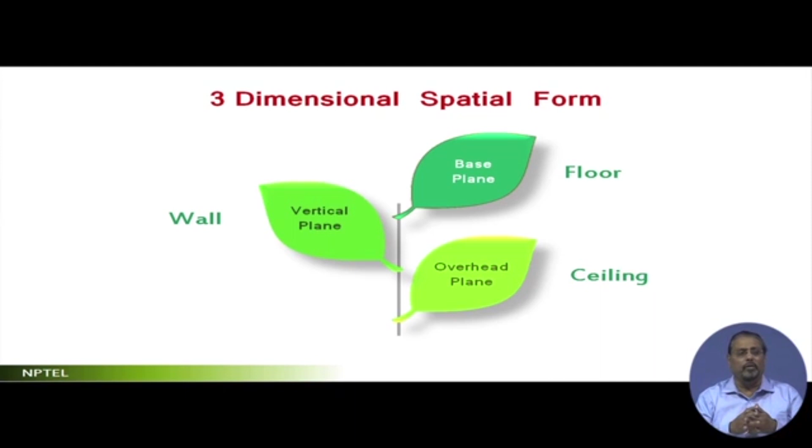The next one is the vertical plane, straight like this. In a building, it is the wall. And the third one is the overhead plane. In a building, it is the ceiling. You can comprehend this very easily if you are an architect or engineer or of any discipline, with respect to an architectural space: floor, wall, and overhead plane. These three planes ultimately make a box, which becomes an architectural space.

Very correct. Now, let us look at this in elemental form. In landscape, what is the base plane? If you go outdoors, it is the grass lawn. What do you have as a vertical plane? A fence. What do you have as an overhead plane? Maybe a pergola. So things are there, only in different form with different materials or different elements.

So here I am trying to focus more on the elements of landscape spaces. Basically, there are two kinds of elements that we will find here. One is the linear element, and another is the spatial element. Linear elements in landscapes are like roads in the base plane. How do you consider what lies in the base plane? Anything below your feet, if you are the user. Anything that goes slightly above and ultimately goes over your head becomes the overhead plane.

What happens to a space which starts with the base plane, remains continuous and ultimately goes to the vertical plane and the overhead plane? It's hybrid, because you won't be able to find out really where it changed. I'll draw one sketch to demonstrate that, in architectural terms. Suppose you have a plane on which you are standing, which has a side like this and ultimately a thing like this, and a person is standing here. I can understand very easily base plane, vertical plane, and overhead plane.

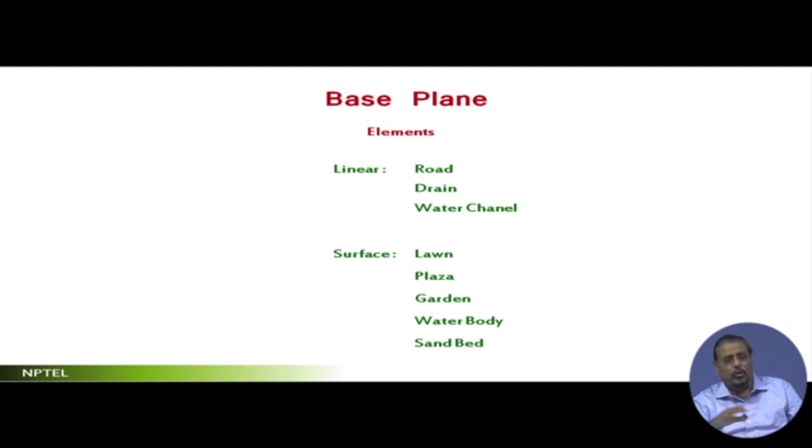Think of anything. I have just given you a few examples; a host of examples you can find yourself. I did not want to clutter this with lots of examples. These are the elements I have picked here, which are very easily perceivable by you. Okay, that is the base plane.

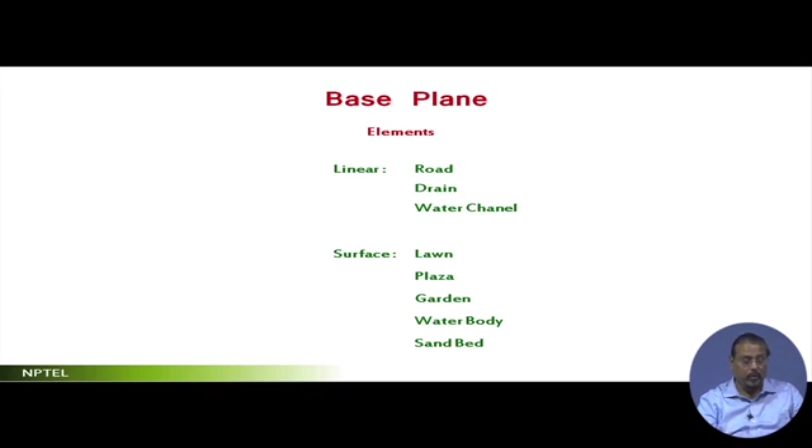do you walk on the water, on the canal? No. But do you sail on the canal? If you do, you are on the boat, the water is at the base. This is how you look at it.

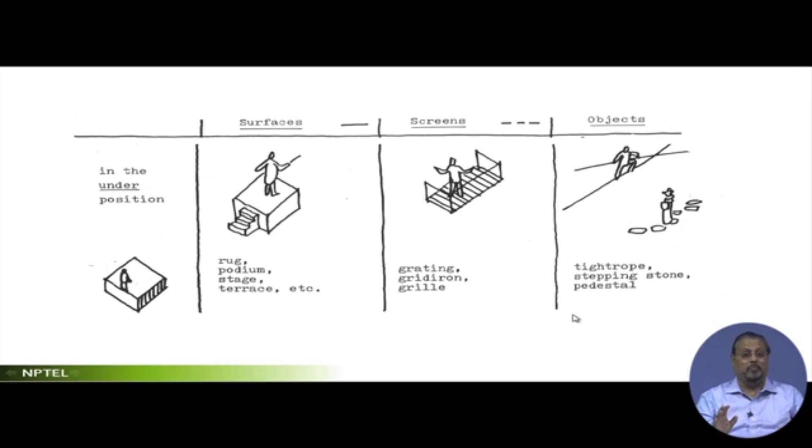Point of reference to a person who is using. For the tightrope walker, this is the base plane, and if you are seeing from below, this is your overhead plane. This is interesting, linear overhead plane. I hope my point is made.

Then comes the vertical plane. Elements, linear and surface, let us see. Vertical plane elements in linear form are tree, lamppost, bollard, signage. What does it mean? Dimensionally, the height is much greater than its other dimensions. The length and width, or the width or depth, this dimension is not 0, but the height is considerably large, where we consider this as a linear vertical element.

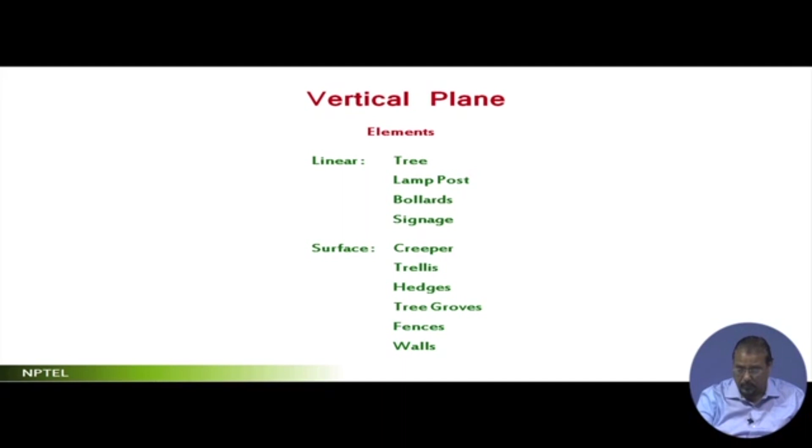Tree. How come a tree becomes a vertical element? Interestingly, a tree becomes different kinds of elements. It can fit in all those kinds of elements. I will tell you how. But before that, let me explain this. A lamppost, okay, a bollard, or whichever. Even, I will tell you, this I have drawn from one side.

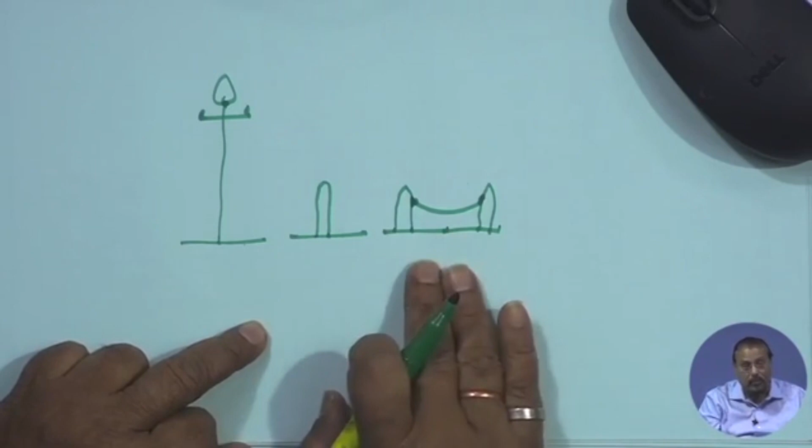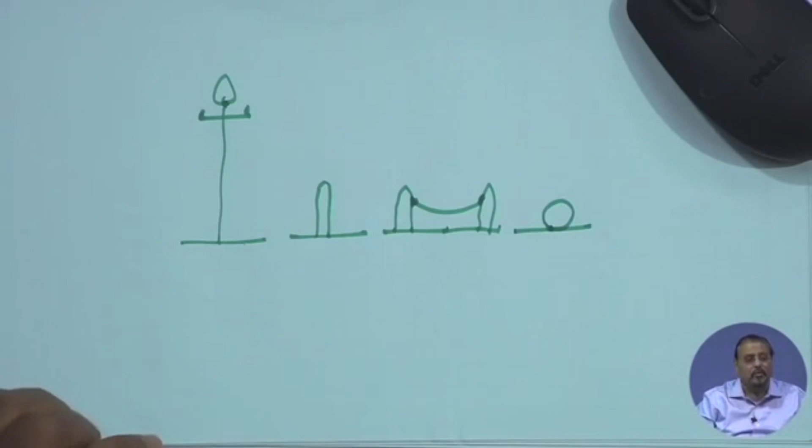If suppose there is a bollard here, the next bollard is here, and there is a chain hanging from here to here. This is also a vertical plane. Mind it. In our landscape, we have plenty of this. You must have seen in many places the bollard is nothing but a sphere, also a vertical plane. The only thing that matters is the scale. Signage, you have a signage here. The post becomes a vertical plane, also this becomes a vertical plane.

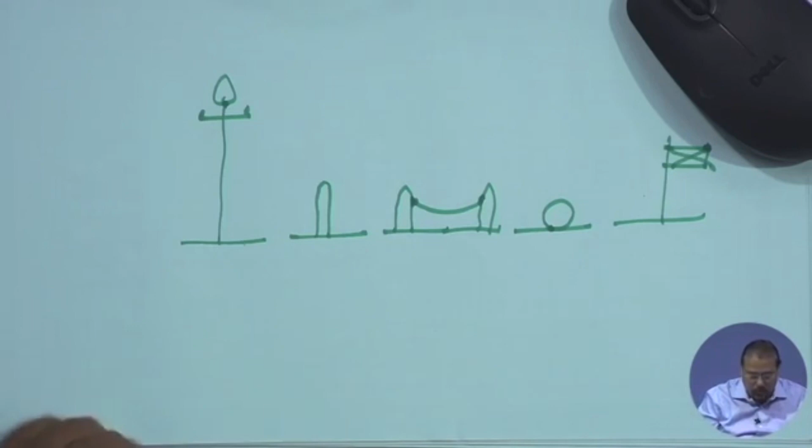So, essentially, theoretically what it is, if you are viewing it from a particular position, and if you are seeing that it is standing upright from the ground to the upper level where your eye hits, it is a vertical plane. If your eye does not hit it at your eye level and it is at a much lower level, still it is a vertical plane. So, let me just try to clarify that idea. A few sections I will draw.

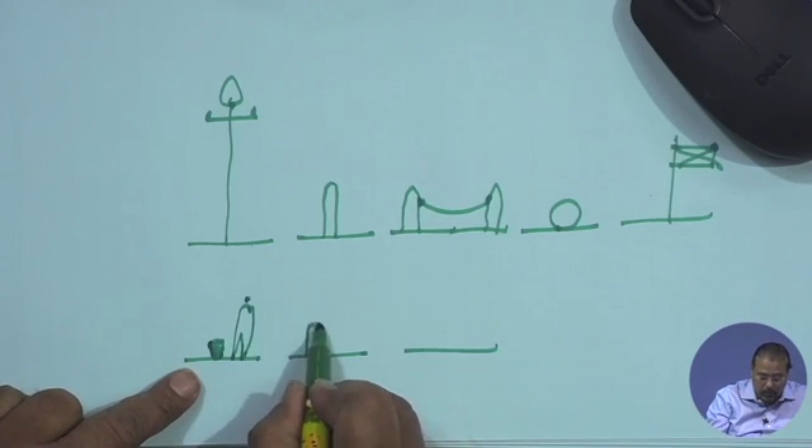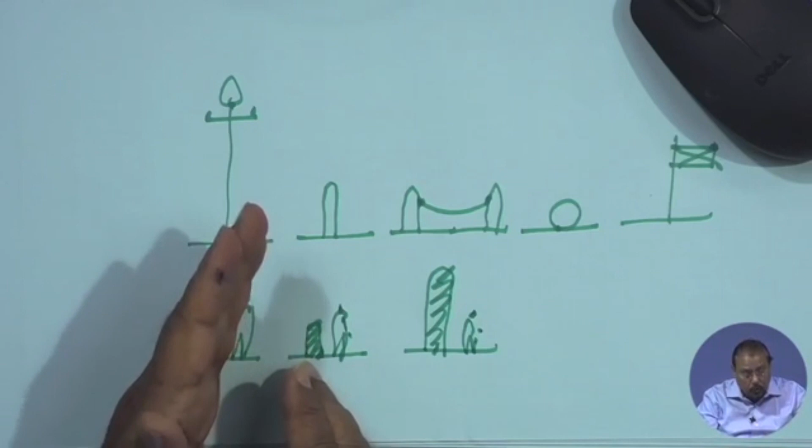A small hedge where your height is considerably high, vertical plane. The hedge is increased, your height is still at the same level, vertical plane. A wall covered with hedges and creepers, your height is still here, vertical plane. So, basically, anything that is protruding or rather upright over the ground vertically up is a vertical plane. Now, tree, how can this be a vertical plane?

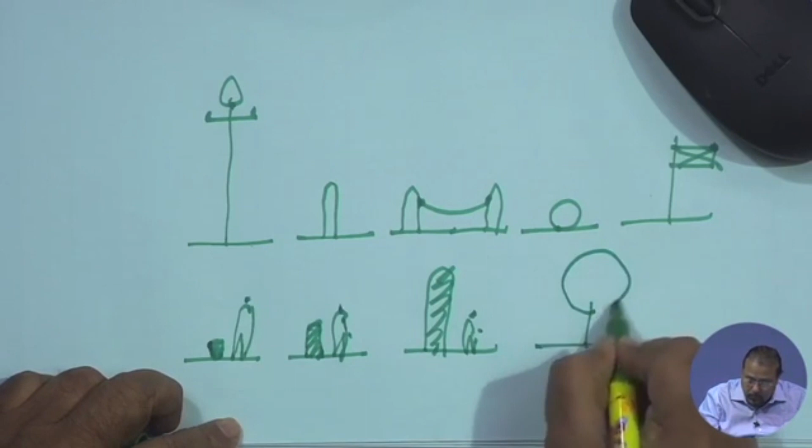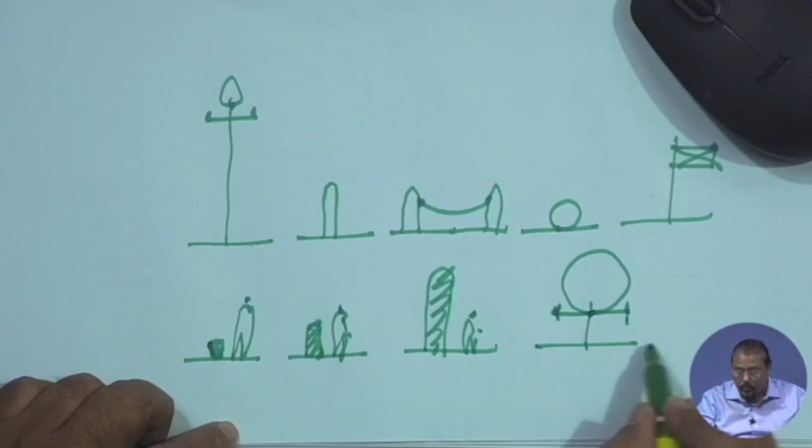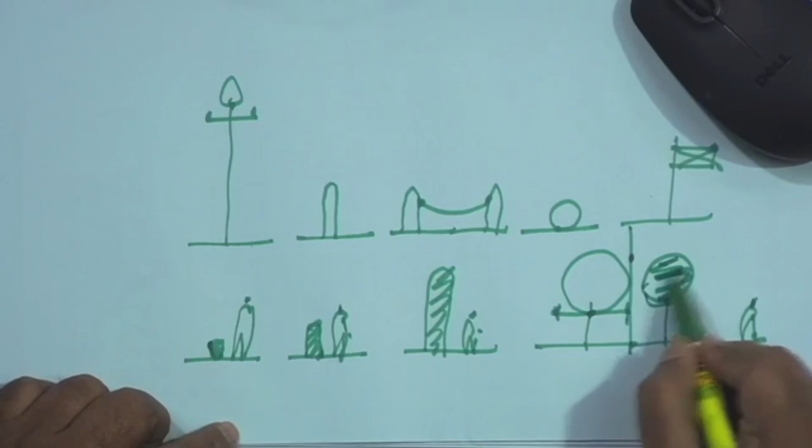It is hanging on to this side by so much. How can this be a vertical plane? Imagine seeing a tree from a distance at this particular point. If you see from here, you will see a projected view of this, which will look like, now again projected view, mind it, I am drawing a projected view now, in which you will be seeing a plate of green and a stick below it. This is what is the vertical plane.

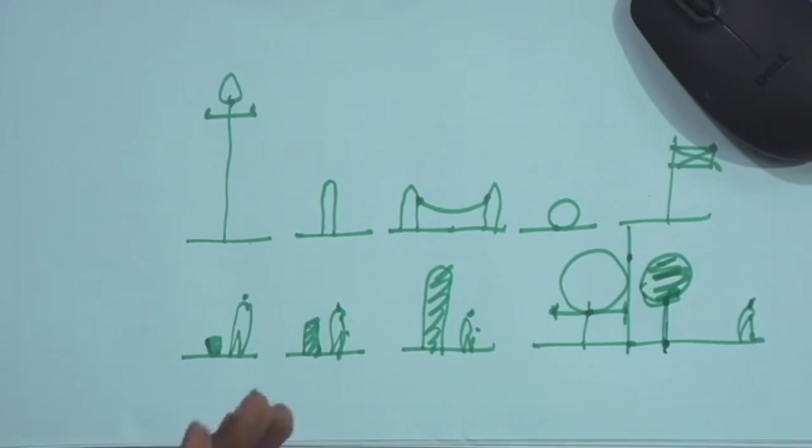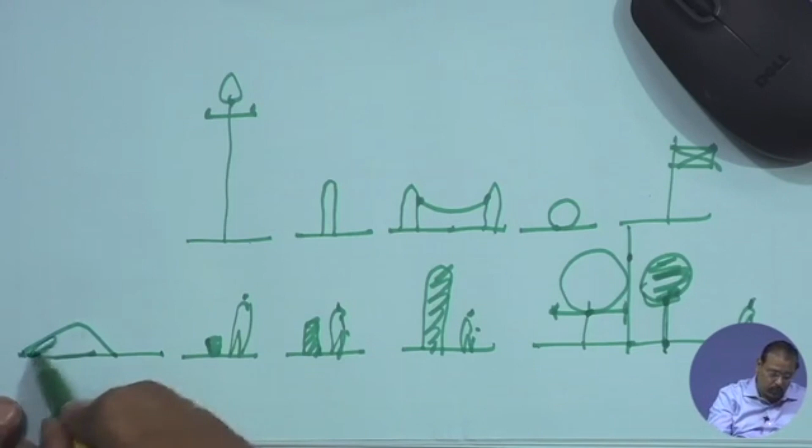So, it is not necessarily geometrically how much verticality it is. Another, the hill, follow this very carefully. The hill at a distance, is it a plane? Is it a triangular plane? No, it is a three-dimensional geometry, but the thing is, when you are seeing it, you are seeing this as a plane. So, the point is, it is which plane we are referring to, the position of that particular element which is being created as an image in your retina, that is it. A two-dimensional representation of an element which you consider as vertical, that is vertical plane.

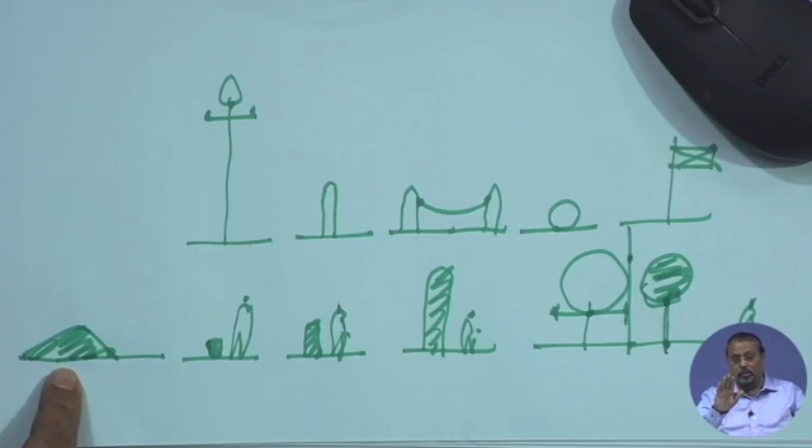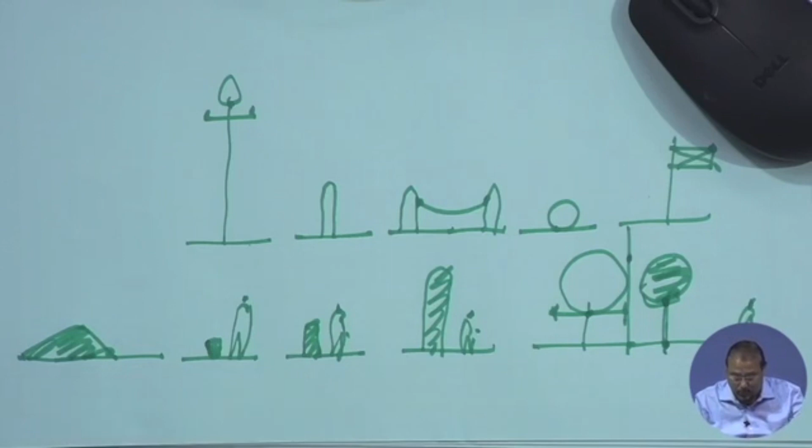Scale wise, if you are very close to a narrow low height hedge, low degree of vertical plane, a slightly raised higher degree, above you is dominating vertical plane, next to this is a vertical plane. Now, if I try to give an example, notice it, I will come to the overhead plane, but still I think this is the time I should clarify. If you are standing below a tree or away from a tree, I am drawing a human figure in a different scale, so that it becomes matching.

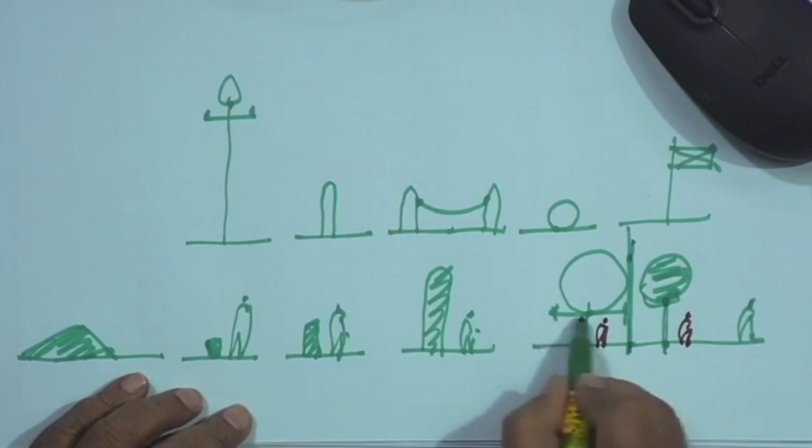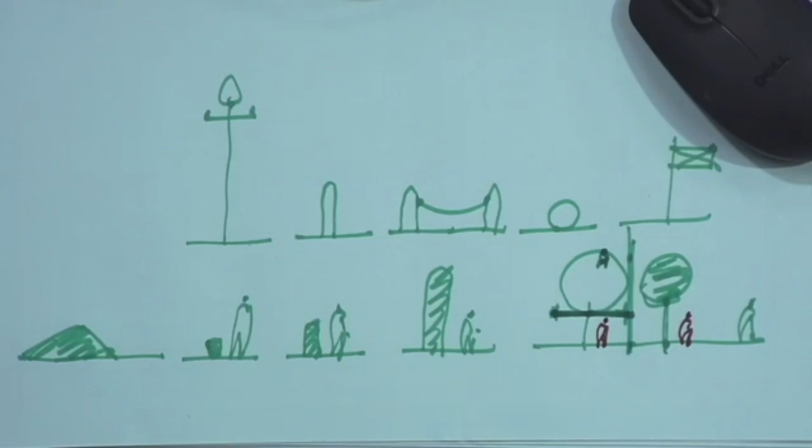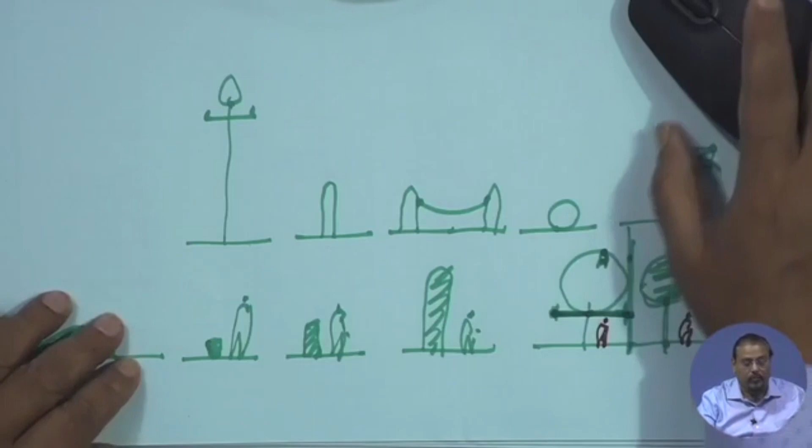If you stand below a tree, then which one is the vertical plane? And if you are standing away from the tree, which one is the vertical plane with respect to tree? Interestingly, if you stand here, the tree becomes a vertical plane. If you stand below, the tree becomes an overhead plane. And if you have climbed that particular tree and you are sitting at the top of this, then your tree is a base plane. Is it clear now? I hope. It is always a point of reference from which you are saying this is base, this is vertical, and this is overhead. Very, very important one, because you are creating spatial results in your landscape.

An example here, same borrowed illustration. The surfaces may be solid, it may be screens, perforated, or it may be objects. This is what I have just tried to explain right now, that this is on the side position. So, what happens is you have four sides. So, essentially in a landscape you have one base plane, four vertical planes and one overhead plane. That makes a space. In an architectural space, you have one base plane, four vertical planes and one overhead plane. That makes a space. Only thing, the character differs because of the elements, because of the scale, and because of the viewpoints and the reference domain.

Okay. So, here if it is surface, look, this building is a three-dimensional geometry, but to a viewer the projected geometry of this surface is the vertical plane. This wall is a two-dimensional geometry almost, with a little bit of three-dimensionality in terms of width or thickness, but to this user it is a vertical plane. Look at the foliage. Foliage has a very strong three-dimensional geometry. It may be multi-layer of trees, but from the reference domain, it is an overall projected effect. So, you see one vertical, another vertical, another vertical.

Now, if you replace the other two verticals with the plantations, it becomes a pure landscape position with the verticalities. And if you replace this particular vegetation with wall, it becomes a pure architectural form. There lies the real catch of the whole thing, but fundamentally the space. Okay. How about this? Screens. What is the meaning of screening? It's perforations. How much perforations?

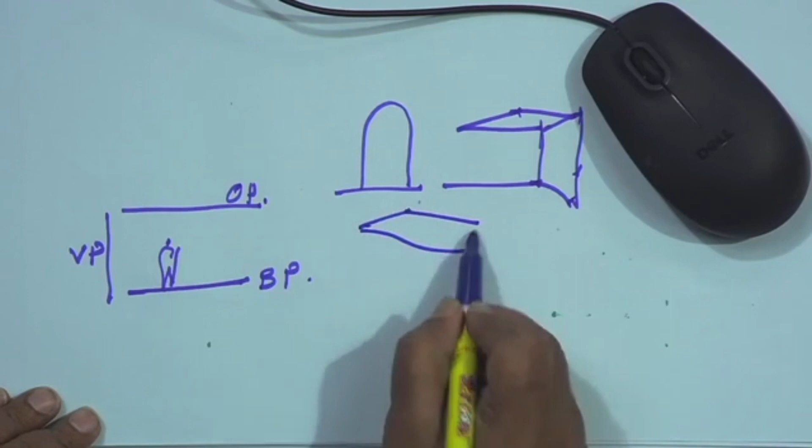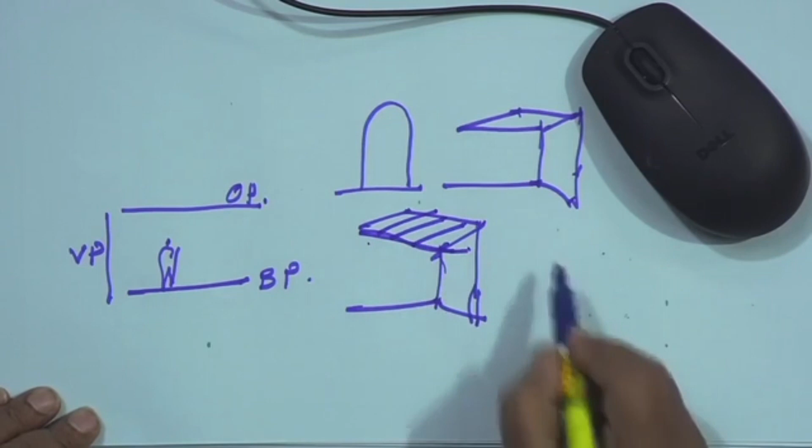So, examples that I have listed here: arbour, portico, pergola, canopy, tree foliage. Let me just draw a very quick sketch of it. Arbour is this, portico is this, pergola is this. Don't bother about the quality of sketch because I am doing it very fast. Pergola is this. Canopy is almost like a portico here. Porticos usually have two sides of support, and the canopy would be mostly overhangs. And the tree foliage is, as I said, this.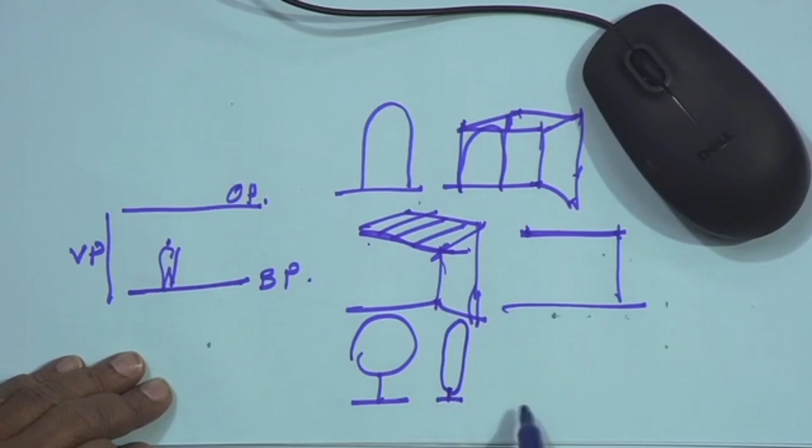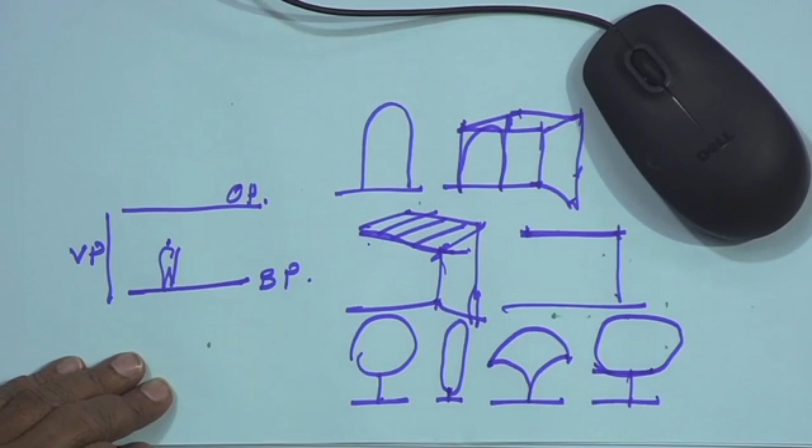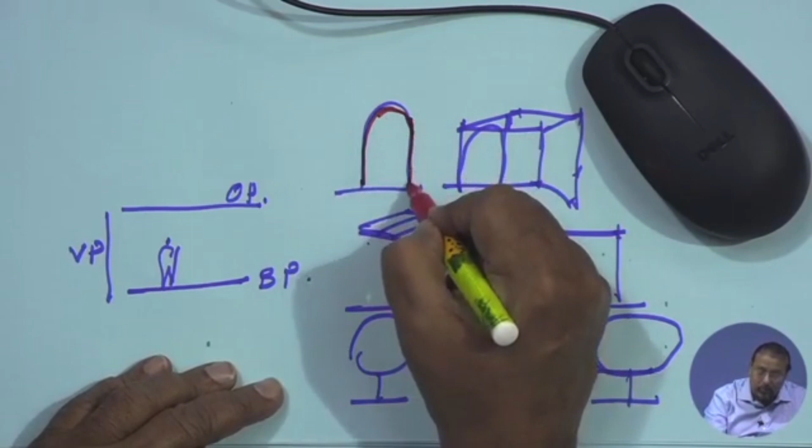Now see, suppose I have a tree which is of this form, or of this form, or else a tree which is very well designed. When I discuss vegetation, an interesting discussion will emerge on these shapes and forms. But here let us try to identify where the overhead plane is. For this it is not a problem, because here we have this as the overhead which blended with this. So, only this much is overhead plane, rest is vertical plane.

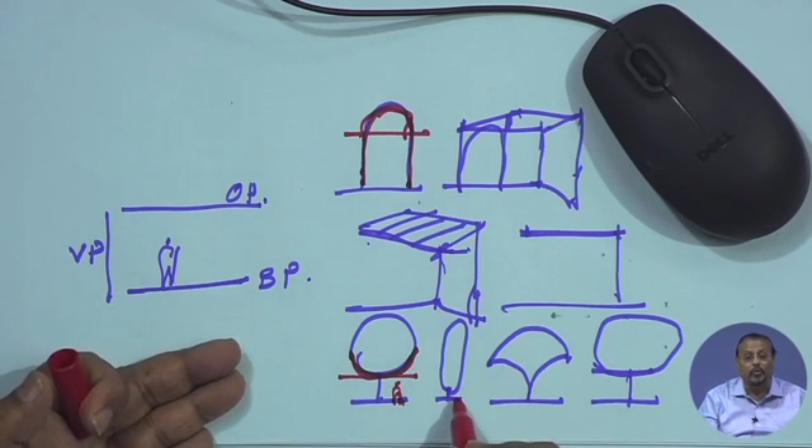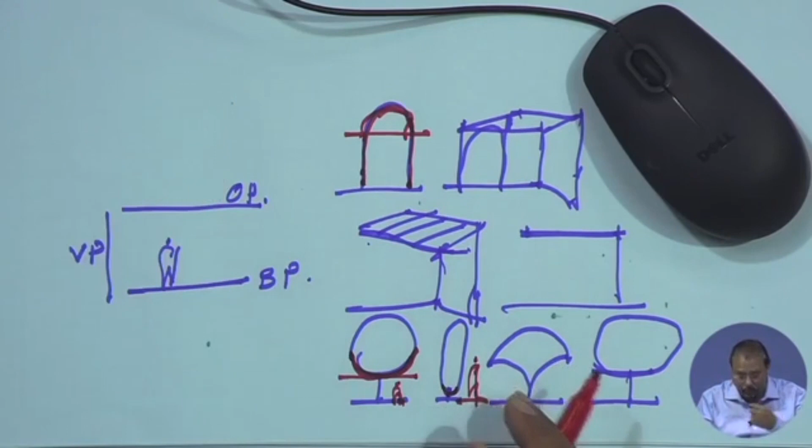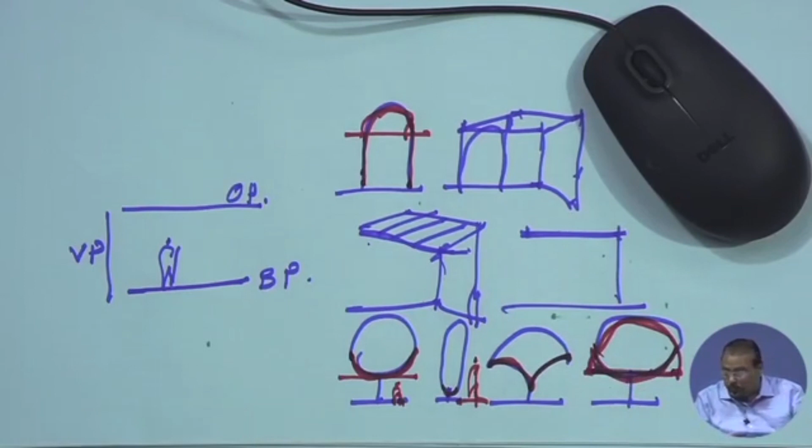But here I will be citing the same example in my hybrid, because this is hybrid. And here basically this base, which will be a projected idea in the view of the users, is the overhead plane. In this, unfortunately, we do not have any overhead plane. Yes, it is there, but you do not realize it because it is so low and you are at this height that you do not get a chance to see it. And in this, you see a plane like this. This is the overhead plane. So, I hope the idea of base plane, overhead plane and vertical plane is clear.

It is so wide that the vertical planes are there, but not that significant. So, what happens in such kind of case is, where is the vertical plane, which one is the base plane, which one is the overhead plane? Look at this very interesting point.

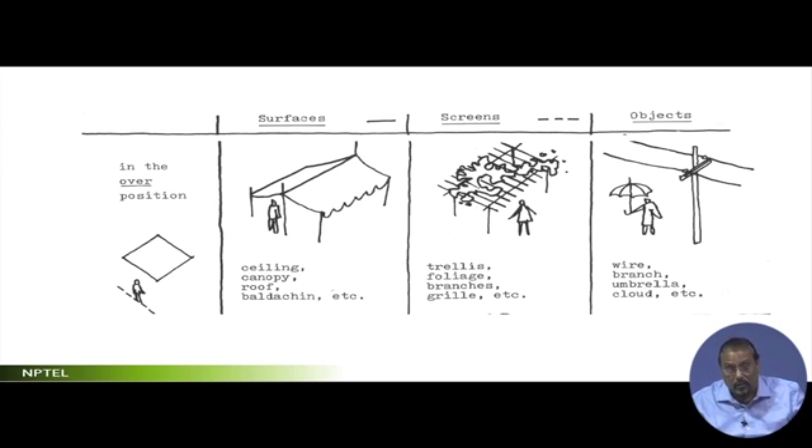A large, recall that Mughal gardens, Taj Mahal, the garden in front, recall that. I am sure you have seen the example in my earlier illustrations as well as from the reference you can see. And the Taj Mahal, I am not trying to draw the Taj Mahal in total correctness, because that I do not dare with this short time, but still it is okay. Now, at the edge we have

vegetation. Which one is the base plane here? Base plane is this one. This particular thing is a base plane. Look at the whole plan of this, even the roof plan of this and the podium also becomes a base plane. You recollect, I think in the Mughal garden example I have given one plan of Taj Mahal. Please reopen that and see, you will understand.

The park, then front garden and then the mausoleum and also the guest house and other things, that makes a whole plan. So, that is entirely a base plane. So, what happens, I would try to say this in this form, that your base plane is nothing but the plan form. Keep that in mind. It will be very easy to remember, very easy to retrieve.

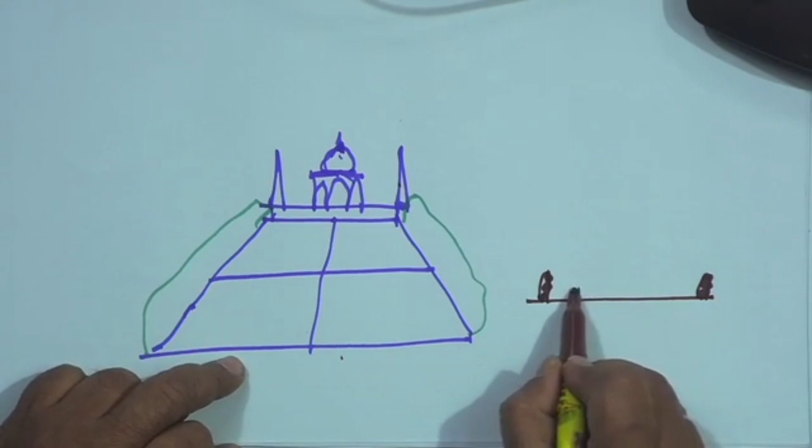look at this section. If I draw a section through this, then I do see in scale the vegetation is over here. At a distance, I am seeing the Taj Mahal with the minarets. What I am seeing here is a vertical plane. What I am seeing here is the base plane. Where lies my overhead plane? Where did it go?

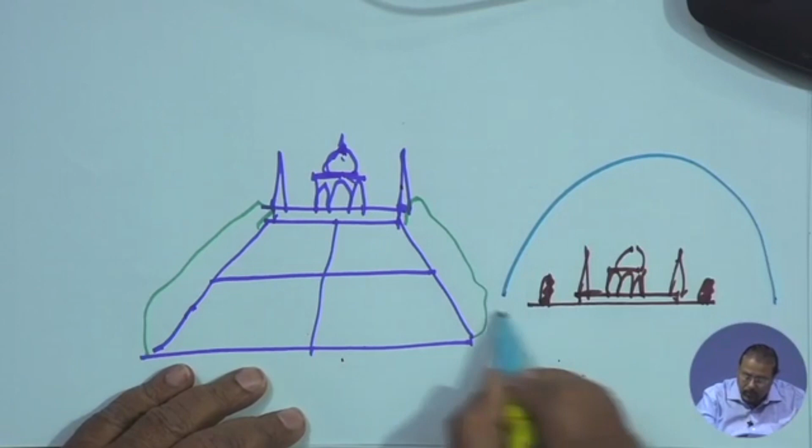Do not underestimate the role of our overhead plane here. This is the real crux of the landscape design. The entire hemispherical dome, the clouds, the sky, the blue sky is our overhead plane. If you ever get a chance to experience the Taj Mahal, I suggest that please go to that garden and see yourself, and at that time recollect my lectures and follow through.

If you are standing in the midst of a Mughal garden, the Taj Mahal's garden, in the night, what is the color of your overhead plane? Black. In the sunny day, it's blue. In the monsoon, gray. In the twilight, scarlet orange. Means what? Your entire plane, which you are not able to touch or do anything with, is playing so much role in your entire landscape environment creation, you just can't imagine. The point is, pay attention to all these elements and do justice.

I don't know whether you have seen this same Taj Mahal standing in the midst of this garden in twilight time, early morning, or on a moonlit night. I have seen the tourists, they go there and they enjoy that particular landscape on the moonlit night, and they wait for the season so that they see it.

So, what happens is the set of planes is one, but the whole ambience that is created by virtue of light, season, air flow, temperature, sunshine or sky clearance, that makes the overall condition. So, when you are thinking about the planes, do not be very regimented in thinking, oh, I have a vertical plane, I have a base plane, I have an overhead plane.

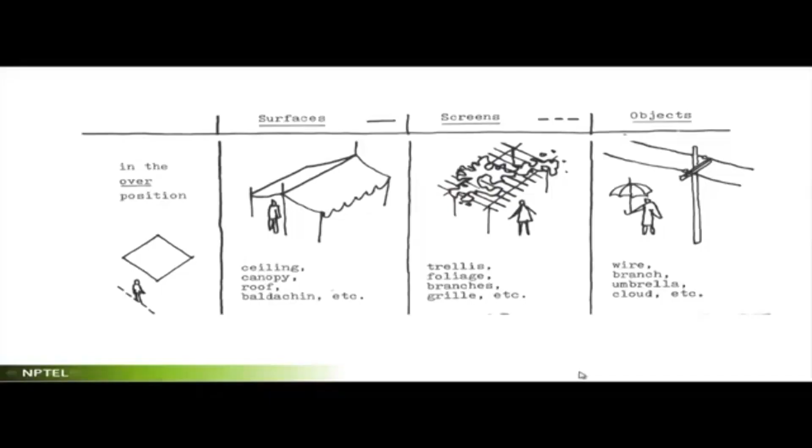The last one which I would say in this is the hybrid plane. You recall that I had given a sketch showing this, the hybrid. So, whenever you have the ground, the vertical plane and the overhead plane, all together it makes a hybrid, and you have all opportunities to create. I will give a very rudimentary landscape example for this, which will probably help you.

Then comes the question of form, elements in terms of form. There are different forms: linear, planar, and volumetric or voluminous. I would say you use volumetric as a reference. I have tried to select elements which are very common in our landscape. In linear form, we have roads, paths, edges, margins, drains, canals, rivers. When I discuss the elements in due course, I will give examples of all these things.